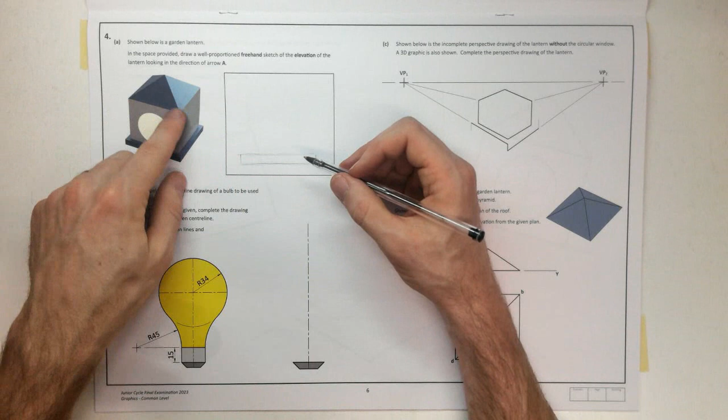Then we have this square, it looks like a square to me anyway. So I'm going to come in a little bit and equal the distance on this side, and that's going to be the length of my square. So vertically up, about that width distance.

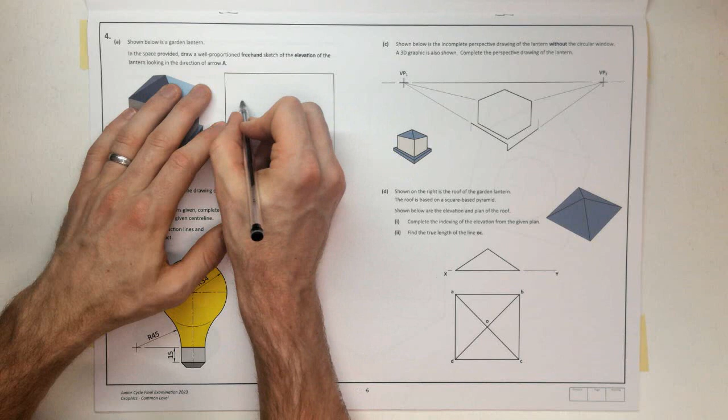So here's my square, and then we've got this pyramid at the top, so that will appear as a triangle. So coming up from the middle, up there. Okay, that will be our top.

And then finally we've got this circle, which isn't quite actually centered. There's a bit of a bigger distance there than there is there, so it'll be kind of there to here. That's our center, our diameter. So I'll go across there just to find the diameter, and let's draw a circle as best we can.

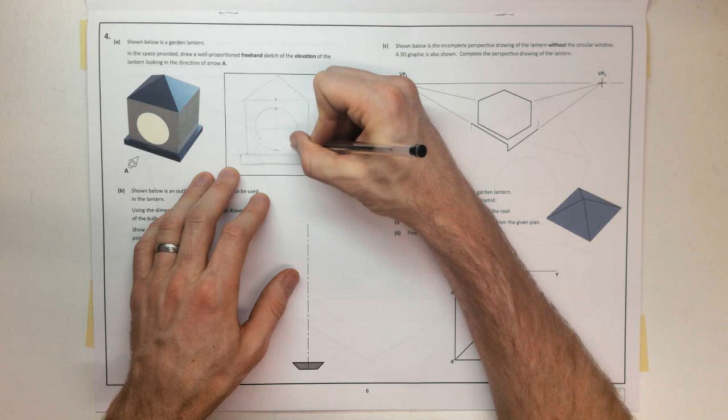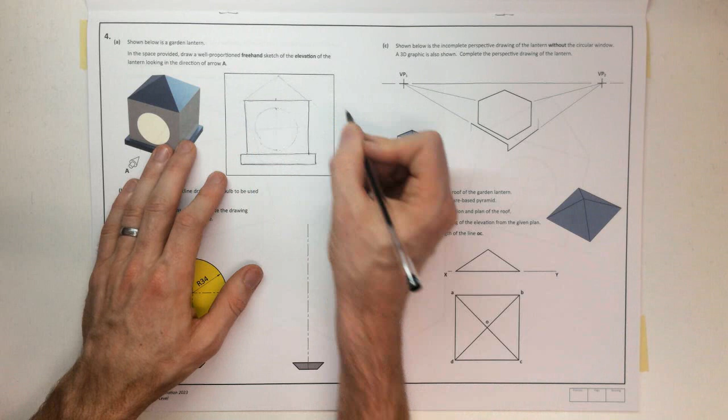Okay, I'm happy enough with that now, so I'll go around everything heavy. All my horizontal lines are parallel to each other, my vertical lines are parallel to each other, and everything is well proportioned. There's consistency in our drawing there.

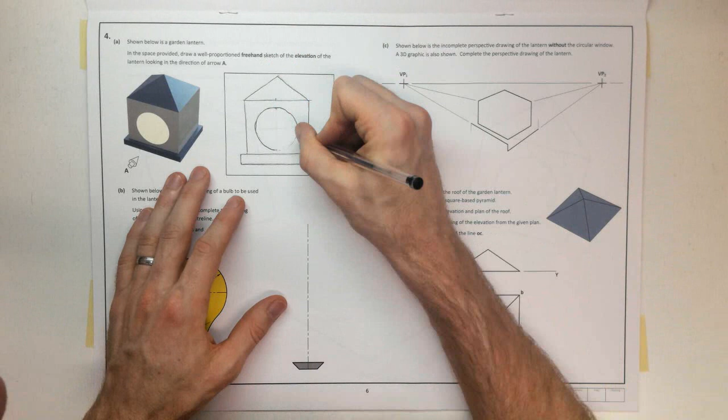Okay, and they haven't asked us to shade or render anything or color anything, so we're happy with that.

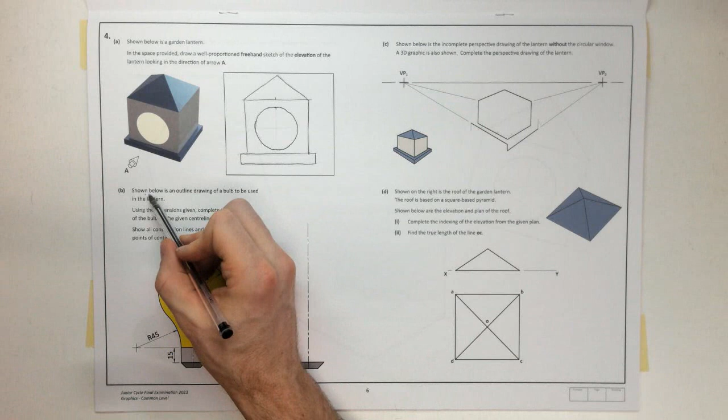Part B: shown below is the outline drawing of a bulb to be used in the lantern. Using the dimensions given, complete the drawing of the bulb on the given center line to show all construction lines and points of contact.

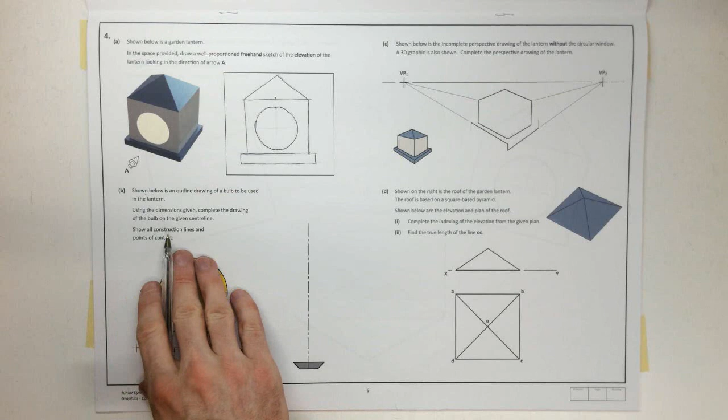So we've got our little base part. We'll start by drawing this little rectangle. Okay, and we have the width of that rectangle, so I'm going to measure up 15.

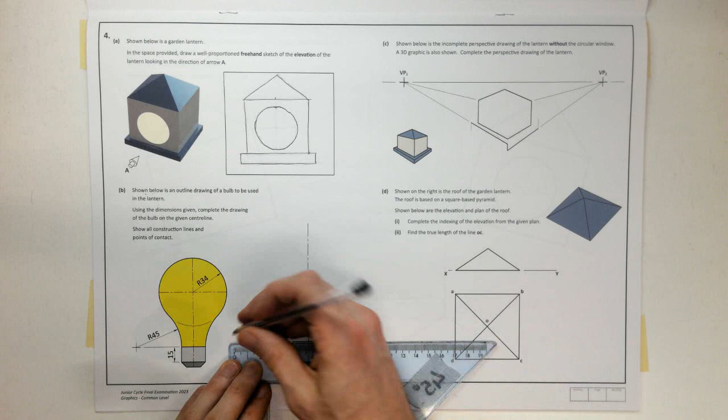That's my rectangle, like so. Then to find the center of this arc, I'm going to go straight out 45, and I'll do that on both sides. So 45 out from here. Make sure we're not going from the center line, we're going from the edge there of our bulb. 45, we'll do the same on the opposite side.

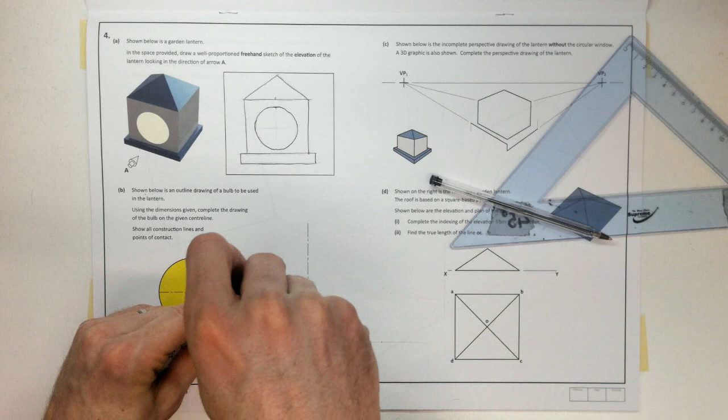45. Okay, so compass set to 45. So it's going there somewhere, and we'll do the same on the opposite side. That's bigger than I need it to be, but we'll see why in a second.

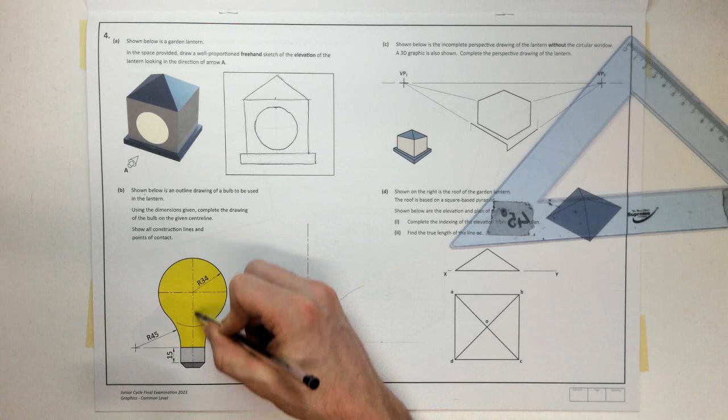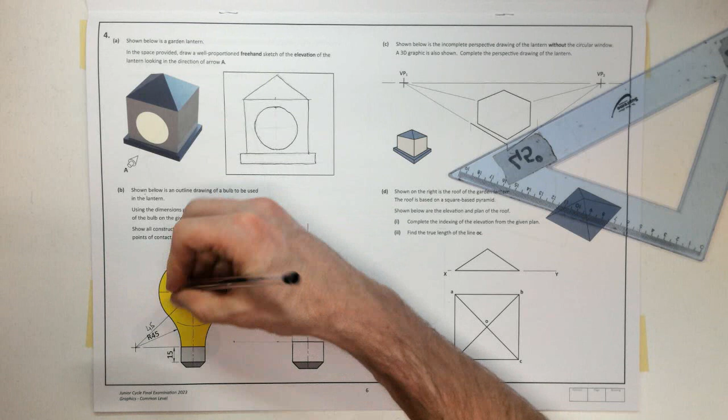So now we want to find the center of this circle. We know its radius is 34, but they haven't told us how far up to go, so we need to start thinking about what we do know and what we do have. So if I was to draw a straight line from this center to this center, it would be 45 to here plus 34, which in total is 79.

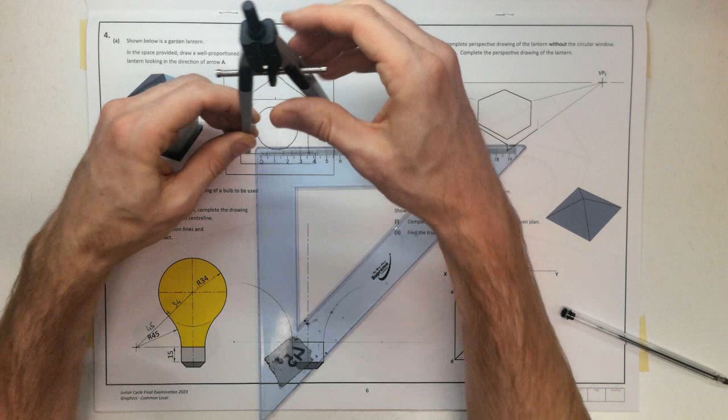So I'm going to get my compass and set it to a radius of 79, exactly 79, and from here I can swing an arc. Now we have a center line, but if we didn't, we could always find that point and swing it from both sides. So here is the center of this circle.

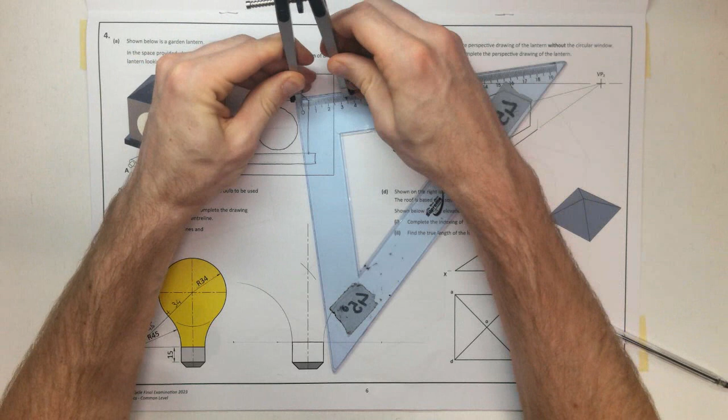So let's set it to radius 34. Done all this accurately, then it should touch perfectly off of that arc. Perfectly off of that arc.

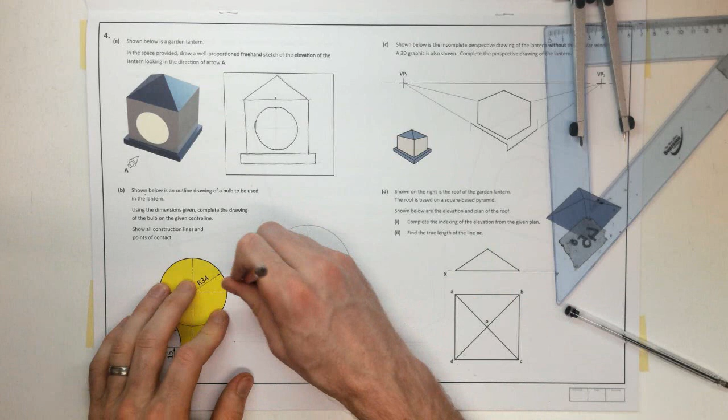Okay, so that drawing is complete, but let me just rub that out because I've gone a little bit too long with it. What they want us to do here is also show all construction lines, so I've shown all construction lines there and points of contact.

So we've got a point of contact here between this arc or this circle and this one as well. So I'll locate the point of contact as I join the centers. Join the center.

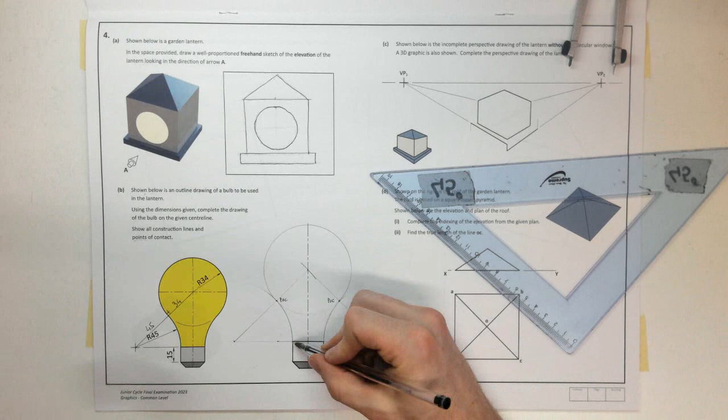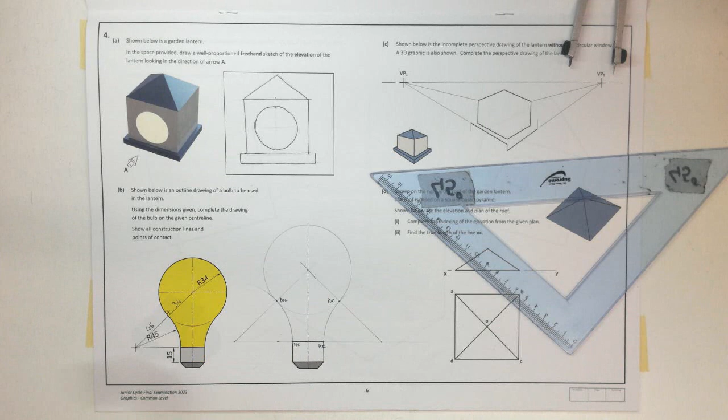Show that a little bit clearer. So where they join, here and here, that's a POC, point of contact. And technically this is a tangential line to this arc, so I'll mark POC there too. Not sure what's required in the marking scheme, but no harm in showing it. Okay, so that is question B.

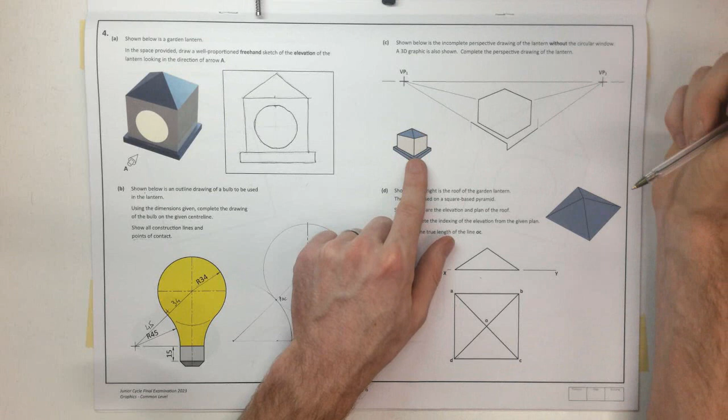Question C then: shown below is an incomplete perspective drawing of the lantern without the circular window. So we're forgetting about the circular window here, don't worry about it. A 3D graphic is also shown. Complete the perspective drawing of the lantern. So we've got our vanishing points, we've got our horizon line. Okay, we'll start at the bottom and work our way up.

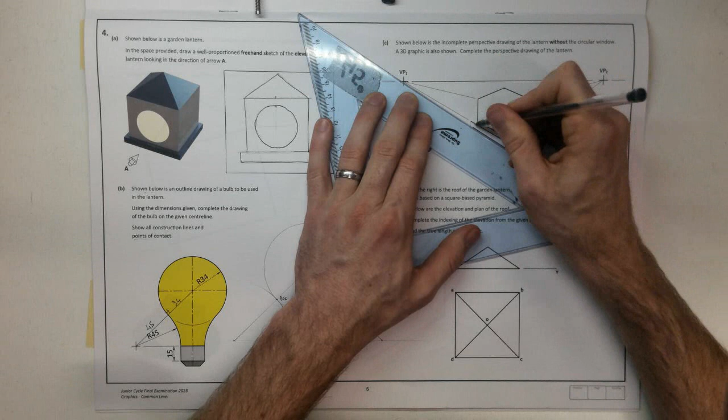So they've given us the height of that rectangle, so they've given us this little height here. So we just need to vanish back to VP1. So we hit that point, and we'll vanish. That one, the base is already vanished there, so we'll vanish the top height back.

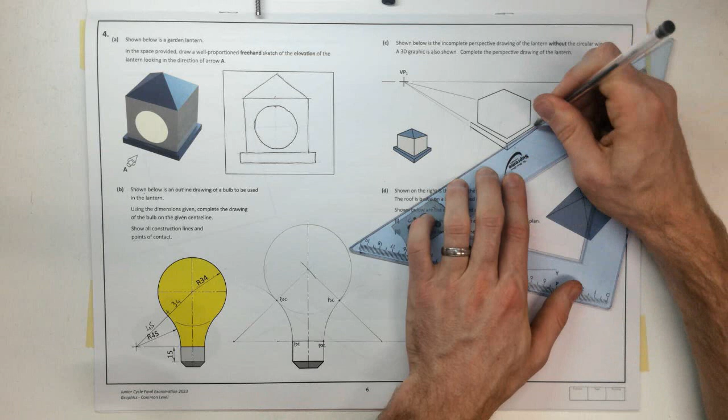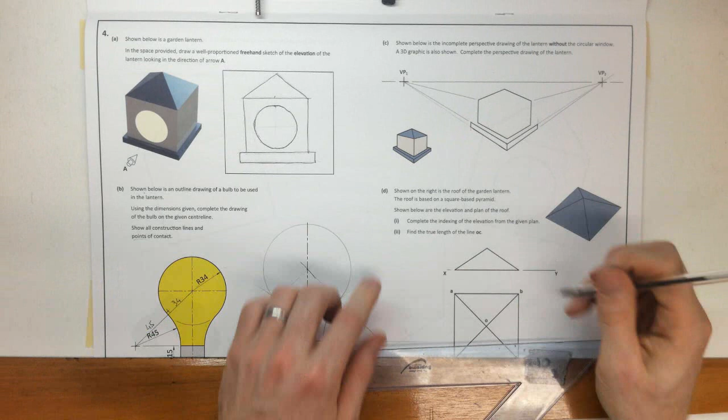And we can draw our vertical edge. Okay, and then we also have this line and this line, those two back lines, so they want to vanish to VP1 and vanish to VP2. So, VP1, show that extend through, and VP2.

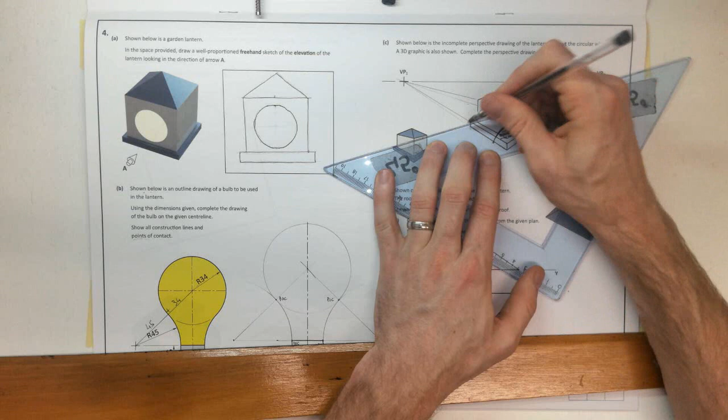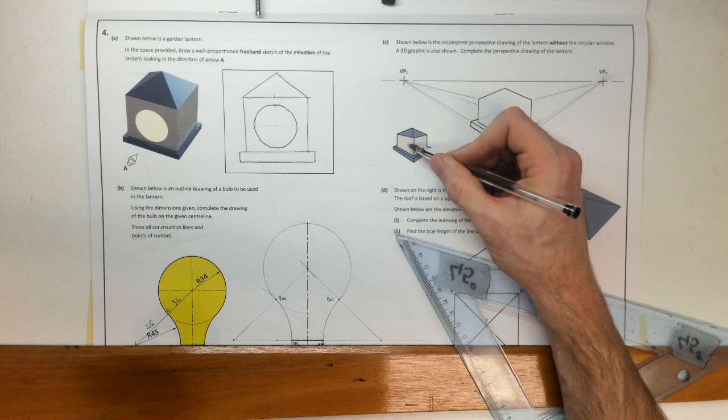Okay. Next up, we want to draw this kind of square. Sorry, is it a cube? Maybe it is, I'm not sure. But we have the height of it. We know the edge is going to be at this point. Let's just first of all draw that vertically up. Vertical lines stay vertical, and then we're going to vanish forward from this corner.

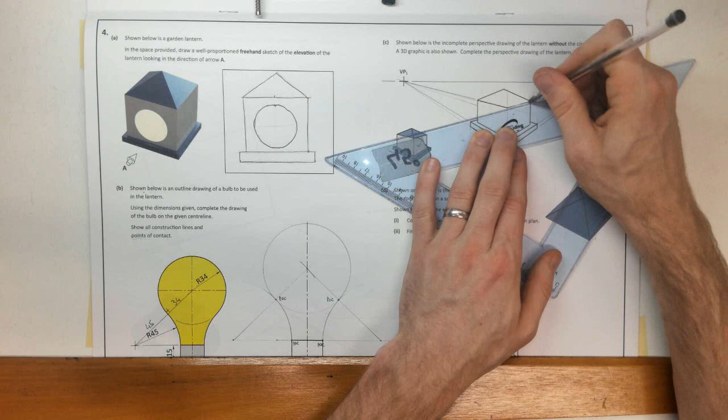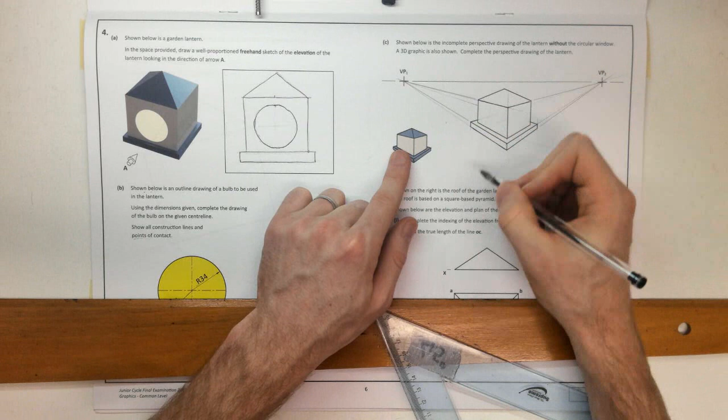Okay, and I can vanish this corner forward as well. And here's my edge. Okay, and then finally I've got that part. They've given them to us. We just need to draw in the last little bit of the pyramid roof. So there we have it. That's question 4, and no coloring or anything needed there.

Right, or part C. Part D: shown on the right is the roof of the garden lantern. The roof is based on a square-based pyramid. Shown below is the elevation and plan of the roof. So we've got our elevation here and our plan here. Complete the indexing of the elevation from the given plan.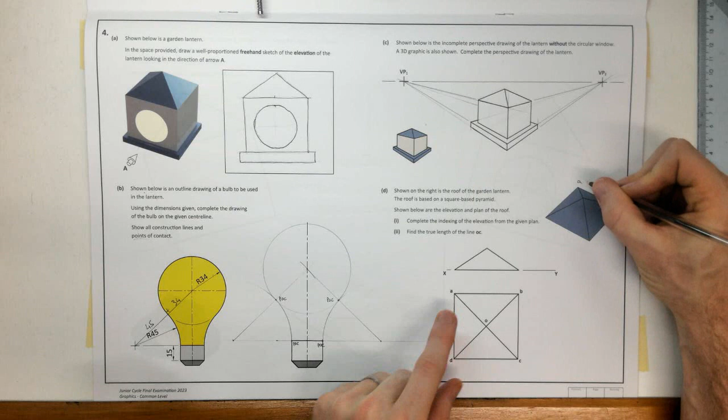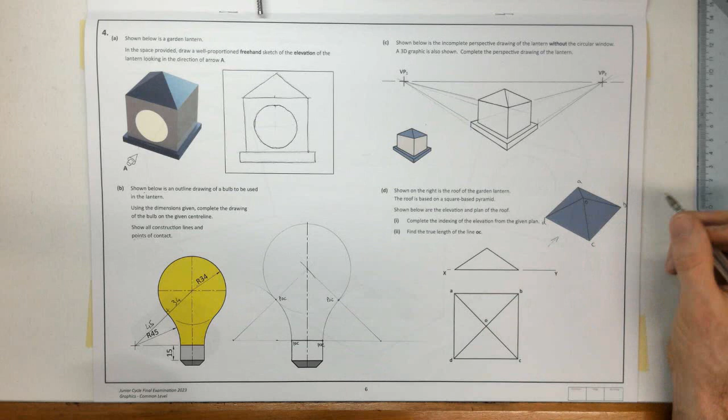So we've got our points here, and I'll actually do it in 3D view just to help us. So we got A, D, top is O, C, and B. Okay, so we're looking down on top there, left eye, right eye, and we're seeing that. So looking in here now from A, or from this direction for our elevation, the very top is going to still be O.

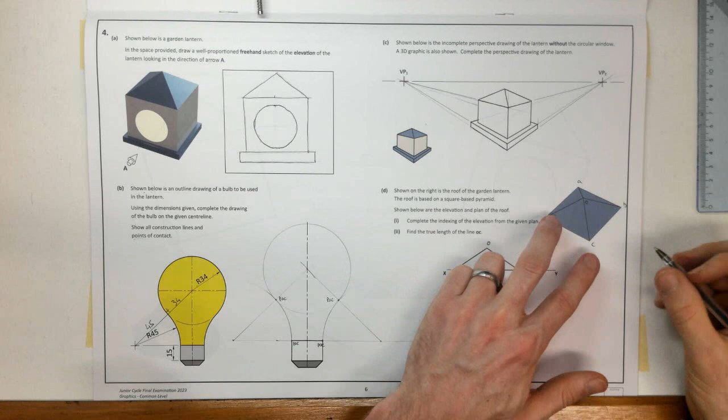Okay, if I'm looking in here, I've got D and A are in line with each other. So that's D and A, comma D. And looking, we got C and B, so B comma C. And you can see there, they're in line with each other. That's in line. So that's our indexing.

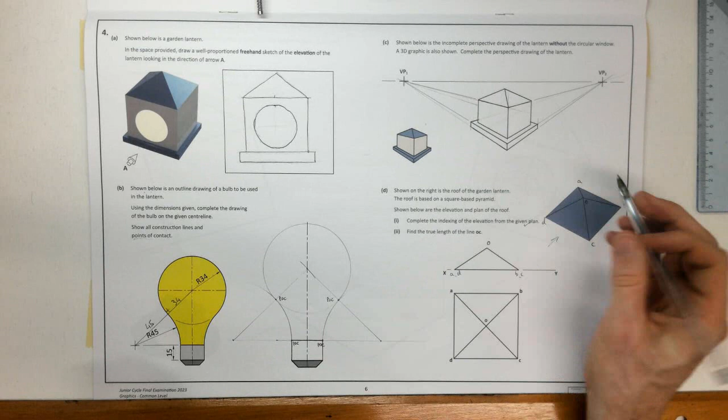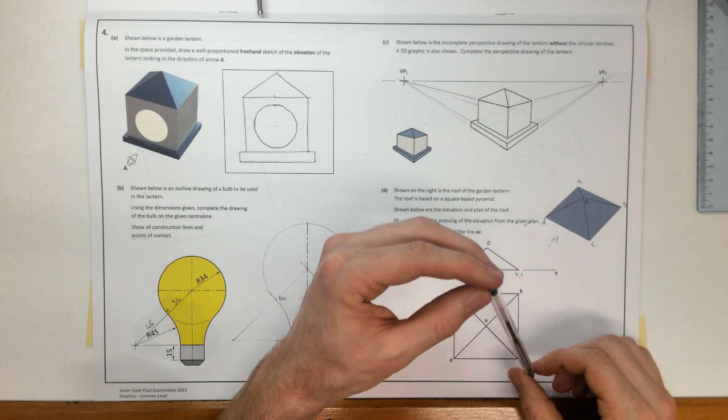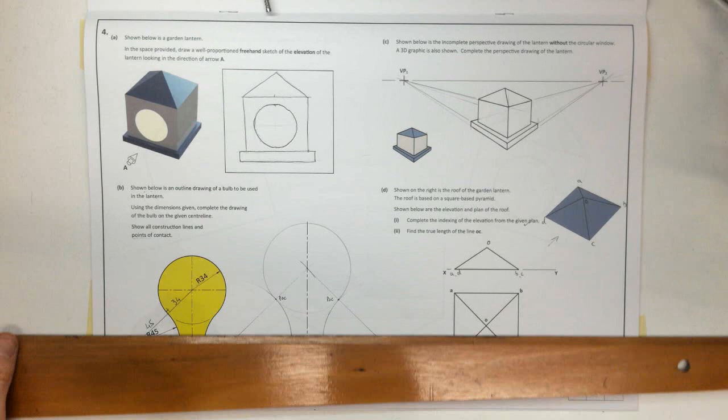Find the true length of line OC. So here's line OC, there's line OC. So if you imagine here, line OC, it's sloping up towards you in the plan view. In the elevation, it's actually sloping out, kind of like this, in this direction. So what we want to do is rotate it around to that position, so that when we look straight in at it, we're perpendicular in the plan or the elevation. So just rotate it around until it's in that position.

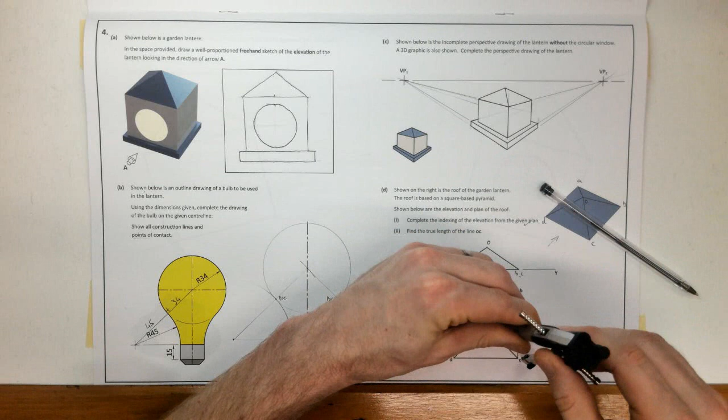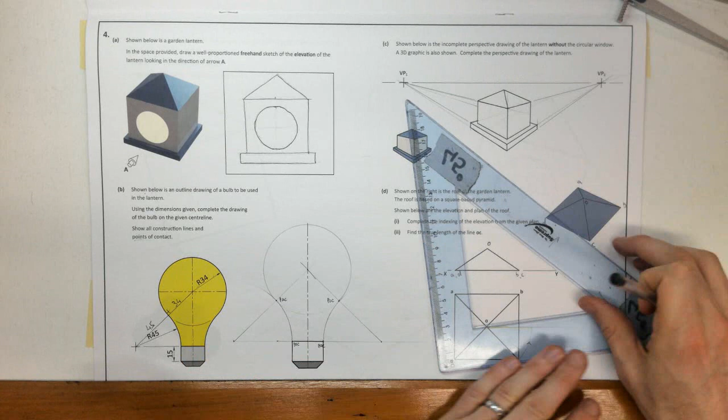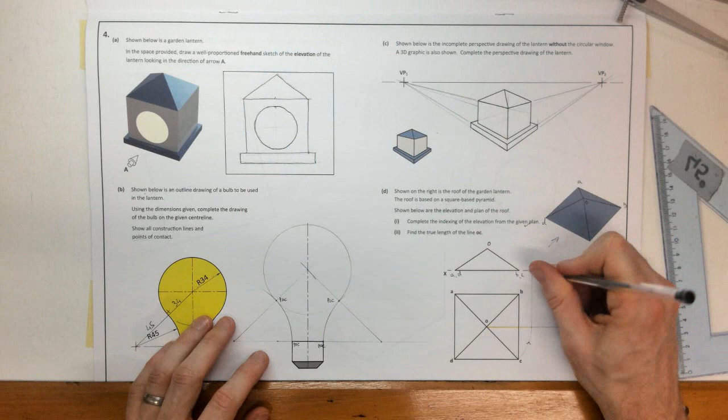So here's point O, C, rotate it to there. So that's my new position for OC. I'll highlight it there in yellow. Okay, and we're going to project that up. The height of C hasn't changed, it's just rotated—it's gone from this position, sloping towards it, rotated around so that we're perpendicular to it. So that is my new C. O is still in the same position. I'll use my yellow to highlight that again. Okay, so that's true length.

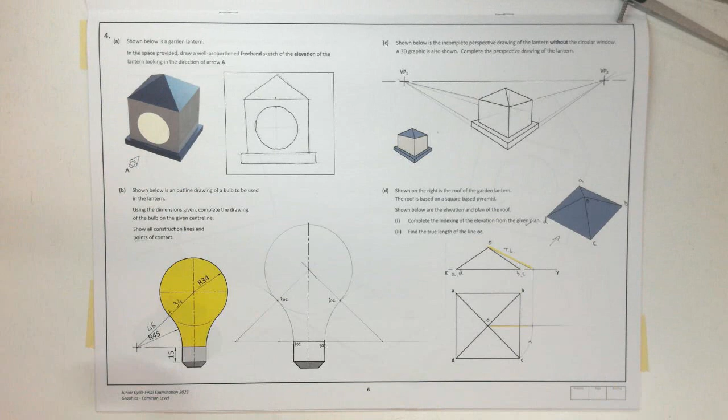Okay, so that's question D completed there.